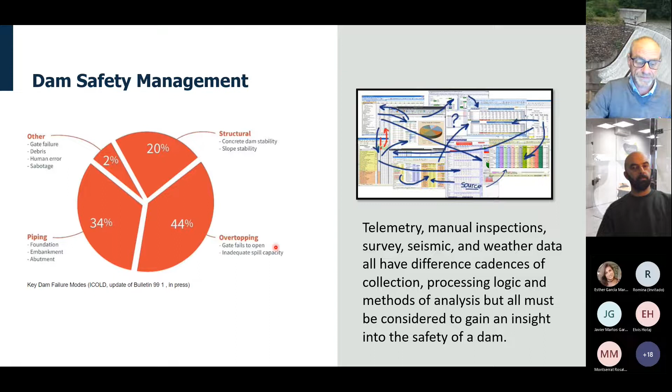So even when we get the data into that one spot for future analysis, there are many questions that need to be answered about items such as, is the data reliable? Is there too much data? Have we got the right alarms? Do we have too many alarms? And what is anomalous behaviour? So ultimately what we're trying to answer is, is the dam safe?

And what we'd like to share with you now are some ideas around utilising artificial intelligence and machine learning to help you with these problems. So Mohsen, can you go through some of these ideas, please?

Sure. The overall idea is not very complicated. We first need to collect data from all the manual and telemetry sources. These data could be seepages, uplift pressures, pore pressures, movements of the dam, shifts, tilts, and these are called dependent values and dependent parameters.

And then we also need to monitor the storage water level, tailwater level, temperature and rainfall, which we call basically independent parameters. And the response of the dam to these independent parameters are called dependent variables.

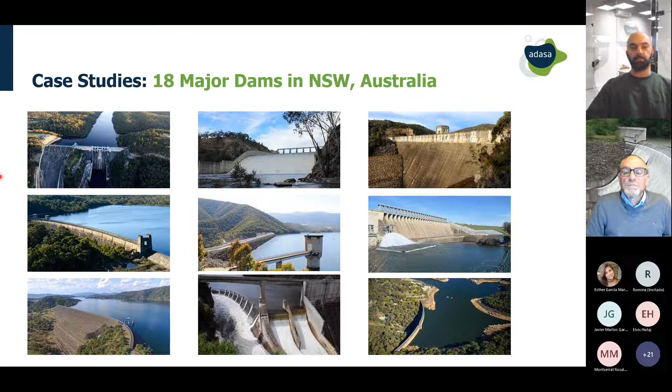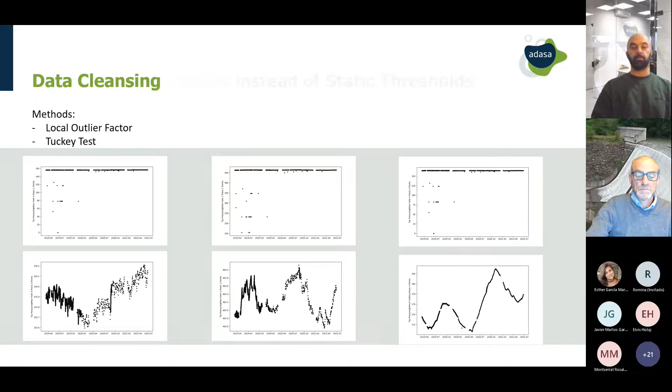Simon: Yeah, I guess most people understand the concept of data breaking a threshold to provide an alert. However, what if that threshold is not applicable under certain circumstances? Let's explore this concept of semi-static thresholds. So Mohsen, can you explain a little bit further, please?

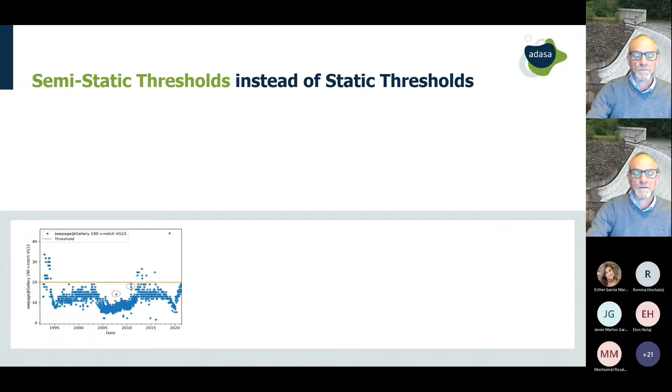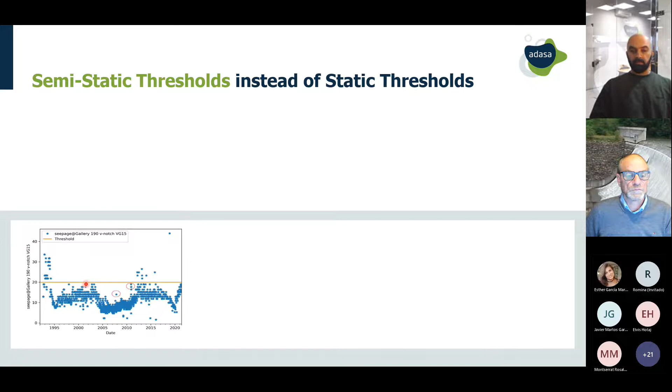Well, dealing with different dams and the way the data of those dams are traditionally analyzed, we found that dam safety engineers mostly use one single number, which is called static threshold, to determine if a measurement is normal or not. For example, if most of the historical seepages are below 20 liter per minute in the last couple of decades, then 20 liter per minute is considered to be the threshold.

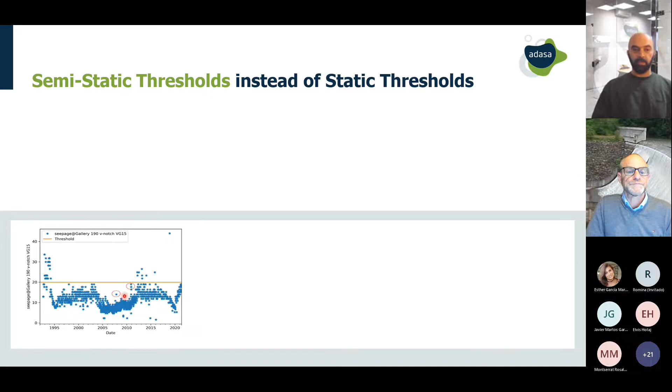The issue, however, is that that single number is found by looking at the historical data of that measurement without considering the effect of storage water level or temperature. It means if the storage water level is low, but the seepage is at 16 liter per minute or 19 liter per minute, for example, these points here, they will seem normal because they are still below the 20 liter per minute threshold.

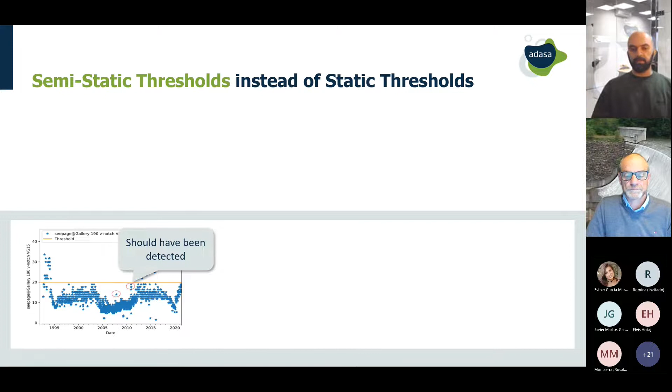A quick and simple fix to this issue is to divide the storage water level into three ranges of low, medium, and high, and also the time of year into two periods of hot and cold, and then define a threshold for each of these 6 regions using some simple statistical methods such as the Tukey test and box and whisker plot. In that way, instead of dealing with one single threshold, we are working with 6 different thresholds for 6 different regions. That's why we call it semi-static threshold.

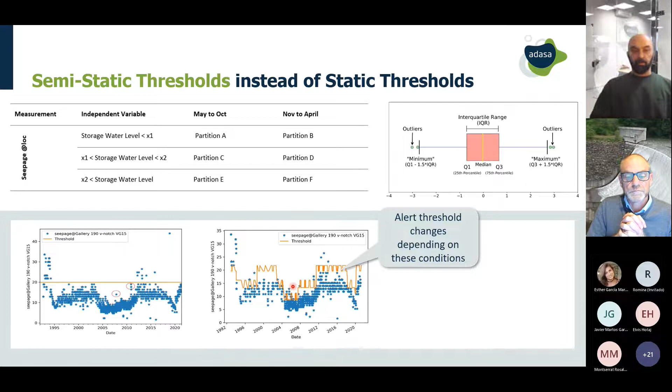The method is very simple, but the results are very good and great, because now, as you can see, the orange line, which is basically the semi-static threshold, is more adapted to the distribution of the seepage. And those points that were initially below 20 liter per minute, but different from the surrounding points, are now well captured by this semi-static threshold.

This is just another example. However, if you want a more dynamic threshold, as you can see here, it's like very much a step-like threshold with only 6 numbers. But if you want to fully understand the relationship between seepage and other parameters, or uplift pressure and other parameters, and then define a better threshold adapted to all conditions and situations, we need to develop predictive models and define dynamic thresholds.

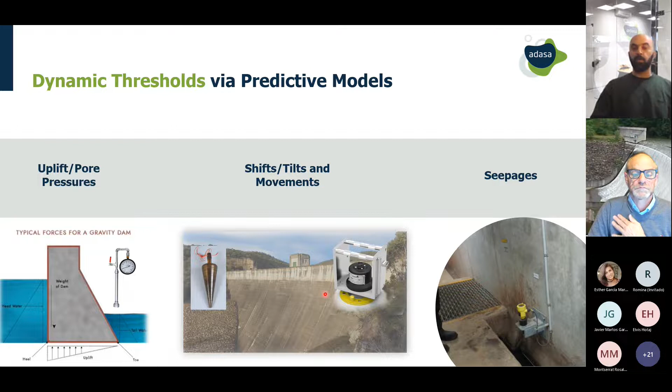And we did it for uplift pressures and pore pressures, shifts, tilts, and movements of the dam, and also the seepages.

For example, to predict the uplift pressures, we know that hydrostatic loads are the main parameters that affect the uplift pressures. However, the age of dam is also important. It means the uplift pressure on 1st of July 2022 compared to 1st of July 1992 under the same hydrostatic load might be different, because of the aging of the dam - the dam aged, or maybe sensors aged.

That's why we chose both the hydrostatic loads and the aging terms to predict the uplift pressure and pore pressures. We used some methods such as the MLP neural network, the multiple linear regression - civil engineers call it the hydrostatic model - random forest regressor or support vector machine regressor, and these are the inputs that we define.

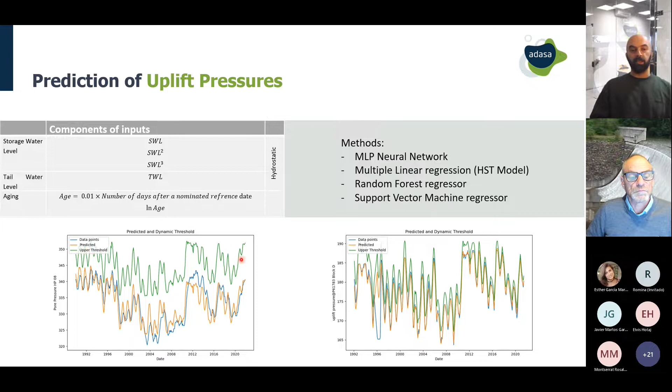And then these are the results. The blue line is actually the real measurements, and the orange one is the predicted values. Using the error between the predicted values and the real measurements, we would be able to define and set up the thresholds, which is the green line here and here.

To predict the seepages, however, we need to do a little bit more because it's more complicated. It's a function of different parameters. Also, we notice that sometimes there is a delay between seepage and other parameters. For example, storage water level is increasing and then seepage is increasing as well.

But if storage water level starts to decrease, we notice that seepage is still increasing. And that's because of the delay between the seepage and the storage water level.

So that's why we considered several potential inputs to build a predictive model for seepage, including the hydrostatic loads of not only today, but also the previous days, rainfall and temperature of today as well as the previous days, together with the aging terms.

We used several algorithms and methods, such as the neural network, the HST model, and the support vector machine regressor, and we combined them with some feature selection methods. Why? Because we defined a lot of inputs, but not all of them are actually important, and not all of them are needed to build a concise but accurate model.

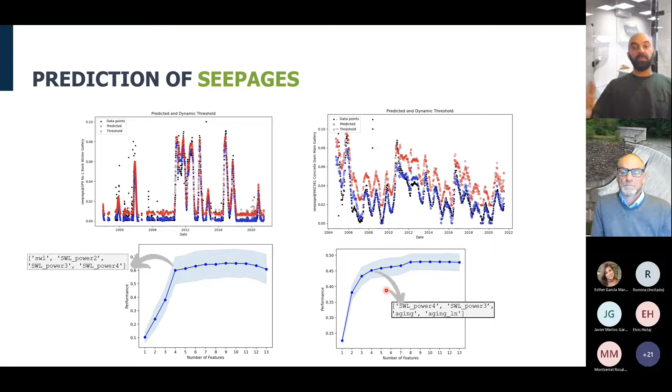So here, those 4 inputs that we picked to build a predictive model are basically hydrostatic loads - some of the terms in the hydrostatic loads, including storage water level power of 4 and power of 3 - and also the aging terms, which are basically the age of the dam and the natural logarithm of the age of the dam.

But Simon, these predictive models are not the only tools to raise alarms. We did also more things.

Yeah, so Mohsen, I guess with that predictive data, what do you do to help make decisions after you've got that predictive data? Can you show us what are the next steps to help make decisions about when to do further work on an asset or to intervene?

Of course. The other method that we found to be useful is the concept of rolling correlation. We used it to find out if the trend of a measurement over years is changing or not. For example, let's talk about the seepage.

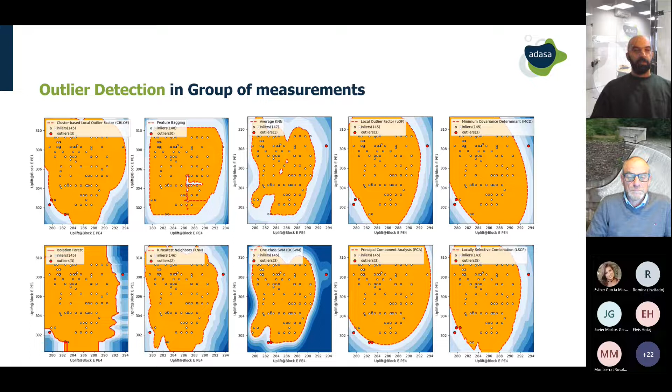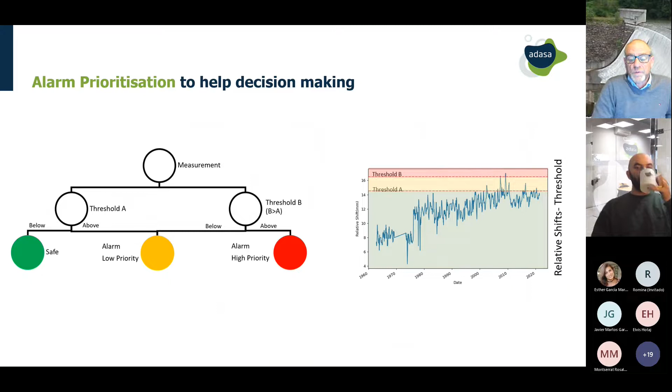Yeah, thanks, Mohsen. I am familiar with alarms and alarming techniques. I have a background also in monitoring systems and asset management. And I guess setting the correct alarm level is extremely important to reduce risk and to ensure that customer service levels are at the highest they can be.

I guess a simple method to set an alarm is a threshold that we talked about earlier on. But you can also do more complex methods where there's two thresholds. So if one threshold is broken, it can be a lower priority alarm, but if both thresholds are broken, it is a higher priority alarm, a bit like a joint probability.

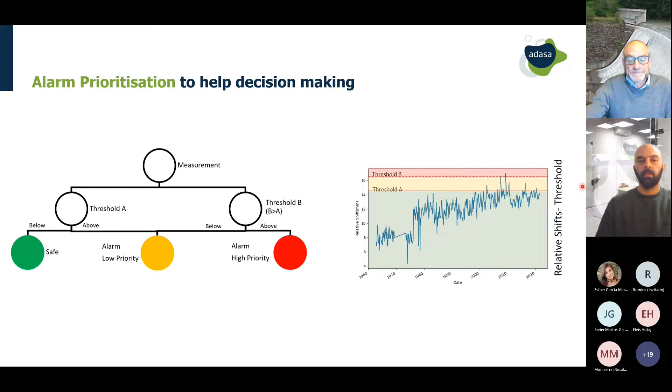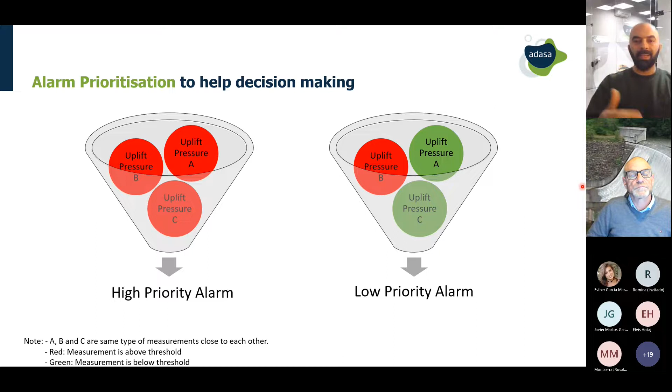The other methodology is looking at different gauges located in the same location. For example, at block 4 of the dam, at the center, we are measuring all the uplift pressures from upstream to downstream at 3 different points. If all 3 gauges show anomalous behavior and all trigger the alarm, we can send a high priority alarm to the dam safety engineers. If only one of them shows unusual behavior, we can send a low priority alarm and wait to see what happens in the next couple of hours or the next day.

The third methodology we're proposing is a bit like a fault tree, where the measurement alarms are linked to a failure mode. If an alarm with a failure mode of high consequence is triggered, that alarm becomes a high alarm. Similarly, if a lower consequence failure mode alarm is triggered, it becomes a low consequence alarm. However, this methodology takes a lot more work to utilize, and it takes expertise from people who understand the failure modes of a dam and can link the instruments that measure those failure modes.

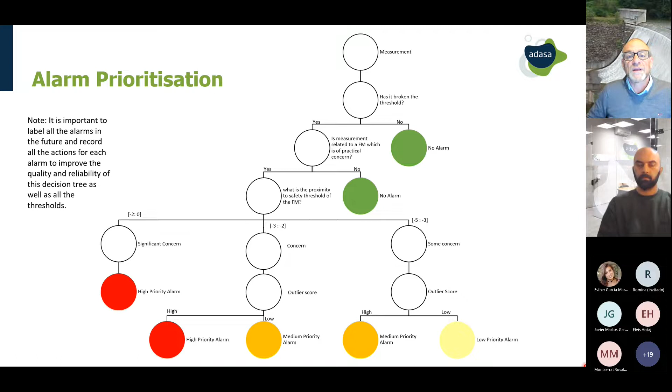We're actually working with one of our clients in Australia on doing some work to link the instruments to the failure modes at the moment, and we are getting expertise from some expert geotechnical engineers.

So what about the vibration of a structure that we're looking at? And I'm not just talking about vibrations that might be induced by earthquakes, I'm talking about the natural vibrations of the structure. Mohsen, can you explain this concept a little bit further?

Definitely. Monitoring the vibration of any civil structure is quite important because it gives you tools and options to uncover many characteristics of the structure, such as mode shapes, natural frequencies, and even damping, and to find out potential issues and damages inside the body of the structure that might not be visible for some years. With dams, unfortunately, this is something that's sometimes ignored, and there are not many works reported on this.

In our practice, working with our clients, we noticed that in one of the dams in New South Wales, they had recorded acceleration signals at 3 different points of the dam, A, B, and C, from the crest to the foundation, between 2015 and 2017 using some wireless accelerometers. They gave us access to the data, and we analyzed it and were able to find out the natural frequencies of the dam in different modes.

Here is the natural frequency of the dam in mode 1, mode 2, and mode 3, and here is the profile of the storage water level. It's interesting to see that when the storage water level is decreasing, the natural frequency of the dam in all three modes is increasing. And when you have a jump in the storage water level, you have a drop in the natural frequency of the structure. The other interesting thing is that with changes in storage water level, the lower modes' frequency does not change as much as the natural frequencies of higher modes, such as mode 2 and mode 3.

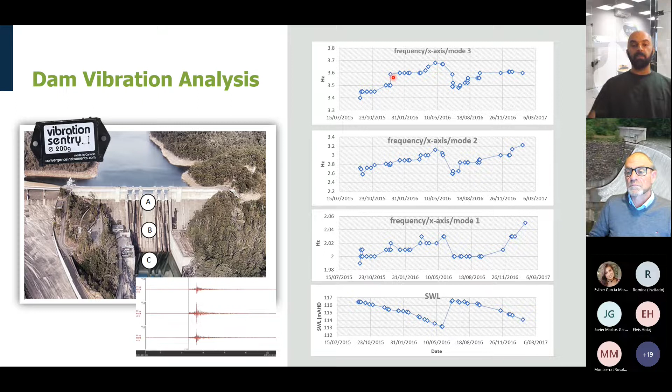However, if we have more accelerometers along the crest of the dam, from crest to foundation and from upstream to downstream, we would also be able to say where the damage is located. That's the benefit of using accelerometers in these structures.

We have not only developed these algorithms and techniques as papers, we've also implemented some of them into an app, that DAM 360 app Simon mentioned earlier. Maybe you can talk about our app DAM 360 that Adasa designed.

I guess Simon. Oh, sorry, I was muted. Sorry, thank you. Thanks, Mohsen.

DAM 360 is actually two apps and a web portal for analysis of data. The two applications are available on mobile telephones and tablets, and the first application is called the Management app.

The Management app allows a dam safety engineer to set up routes and instruments to collect, and also to collect information from existing telemetry and other IoT type instruments.

That application then provides a route for someone to utilize and do the collection of data. So if you're doing a daily collection, you will follow the route set up by the dam safety engineer to read the instruments and different conditions of the dam, including taking photographs and entering information about the condition you find.